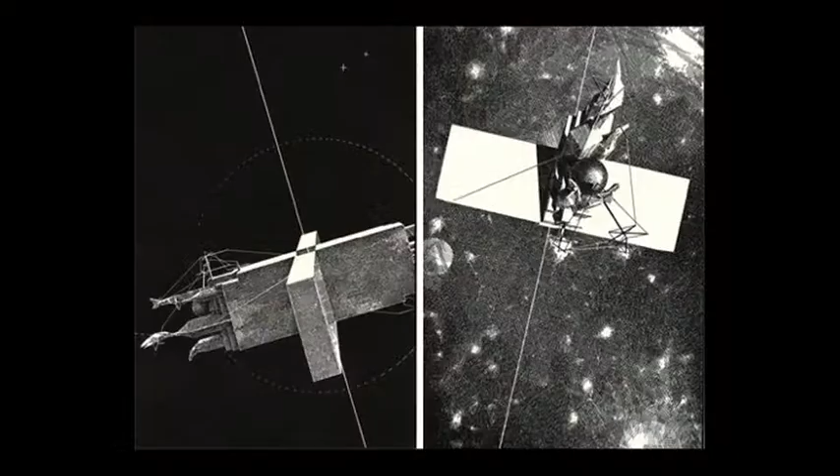Lebbeus worked in ways very mysterious, kind of, he had collaborators, but he led the charge. And I asked him to do a pamphlet architecture in 1980, and he made up this idea of a pamphlet entitled Einstein's Tomb.

From his words, "The tomb is a vessel journeying outward on a beam of light, following an immense and subtle arc through the stars. For eons it will inhabit the dominions of space, until in a distant time it must return to the world of its beginning. Thus a cycle, the epicycle of space and time, will close."

We know Einstein's not buried in that tomb, so I imagined that that tomb was launched on October 30th by the 1,000-mile-long storm Sandy, and now Lebbeus himself travels on his own beam of light invention. And a little bit more on Lebbeus.

By the way, you can access his websites. Many of the things that he said are still quite accessible. There's a lot of information still. And there's one section called By Way of Resistance.

Lebbeus says, "It seems to me if architects really want to resist, then neither the idea nor the rhetoric of resistance has a place in it. Rather, they must create an independent idea of both architecture and the world. One looks for principles, but we are better off if we control them, not the other way around. Principles can become the tyrants foreclosing on our ability to learn. When they do, they too must be resisted."

So these are a few of his, right off of his website. Resist whatever seems inevitable.

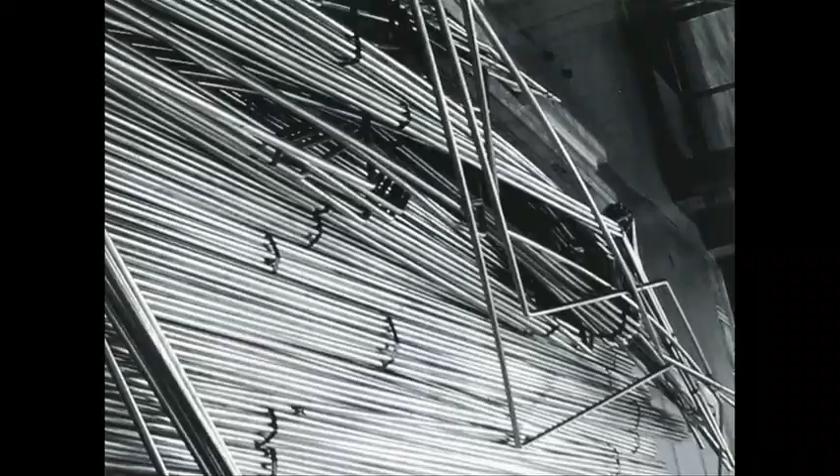Resist people who seem invincible. Resist any idea that contains the word algorithm. Resist the impulse to draw blob shapes. Resist the desire to travel to Paris in the spring. Resist the desire to move to Los Angeles anytime.

Resist the idea that architecture is a building. Resist the idea that architecture can save the world. Resist the hope that you'll get that big job. Resist getting jobs.

Resist taking the path of least resistance. Resist the temptation to talk fast.

Resist anyone who asks you to design only the visible part. And by the way, that's really happening a lot lately, so I'm going to read that one twice. Resist anyone who asks you to design only the visible part. Resist the idea that you need a client to make architecture.

So in the spirit of Lebbeus, this talk then goes back to when I didn't have any clients, and Mark kind of referred to that. And I just made these projects up.

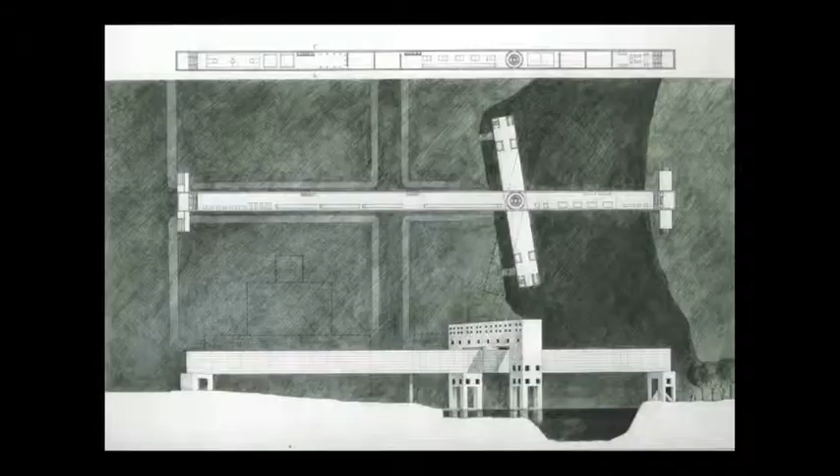I invented a client. This was a gymnasium in the South Bronx, not far from here, a bridge out of the destitution of the South Bronx. This is 1977, and I drew this in Prentis Hall on my brother's drawing board. He was doing a Master's of Fine Arts. The form of the building is a series of bridges over bridges.

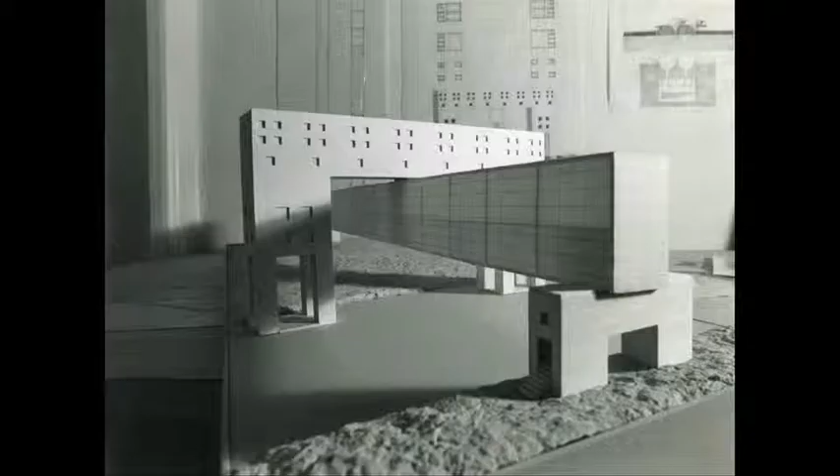Small entrance bridges at each end of the main span served a view down the axis of Brook Avenue. We're not really far from that site. The bridge is in water rather than over water and acts as a structural pivot from which the turnbridge portion of the main span rotates, so ships can go through the channel. You see someone in a rowboat coming down the channel.

And in the floor plan, we had to invent a new sport called long basketball in order to fit it into that long, skinny plan.

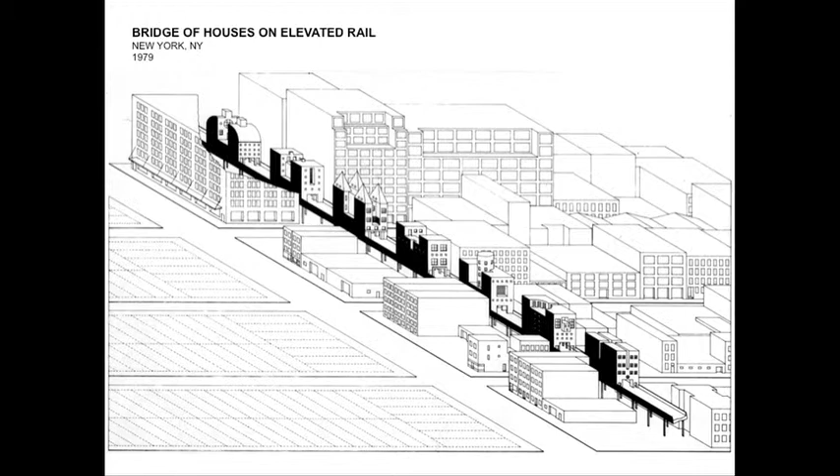Another without-clients project I started in 1979. And I saw myself the last boxcar go over the High Line, and it was a boxcar full of frozen turkeys. I think that was appropriate. And I'm very happy today that I can walk to work.

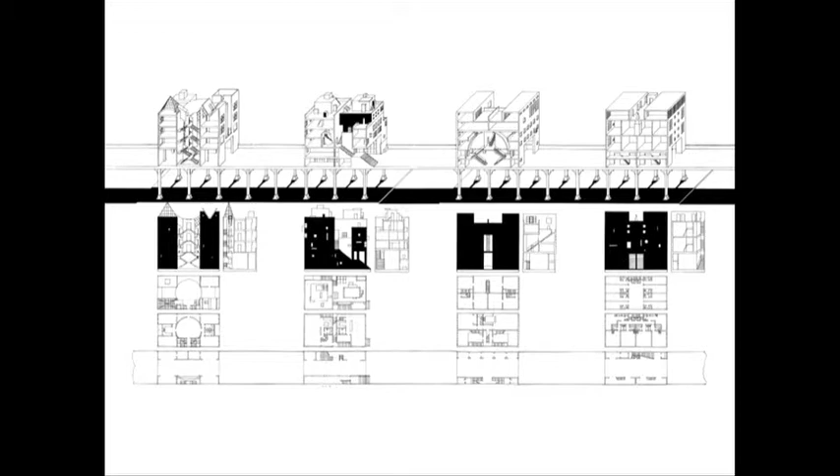This, by the way, was an idea about how many different kinds of people can live in Manhattan. Like you have an SRO hotel, you have luxury condominiums, you have student housing, you have, let's say, 2-bedroom apartments. But right now it's all luxury condominiums, unfortunately. But the public space is there.

And we made several models, many, many models in steel. Another clientless project was the Gedenkbibliothek, a competition in 1988.

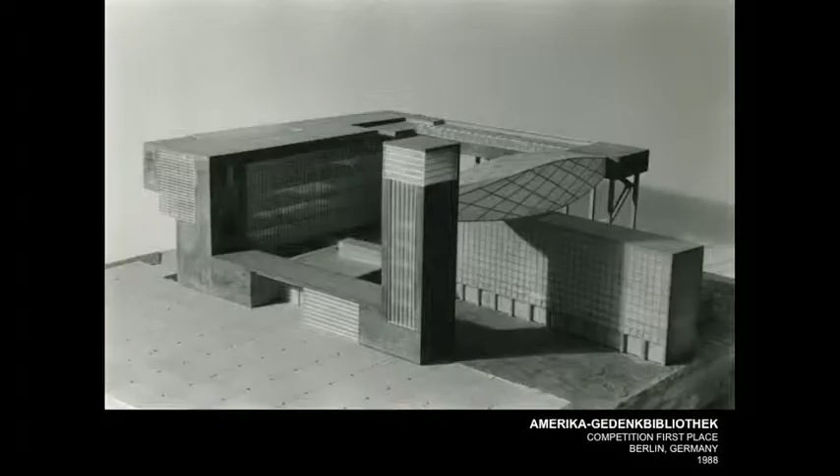The original competition for the Amerika-Gedenkbibliothek, right after the airlift, was for German architects and was paid for by American funds. And this was the reverse. There were 13 architects invited. My project won. It was about a browsing circuit, about the unknown meeting of the user and the book.

The notion of really open stacks. This is one of the first open stacks libraries in Germany, built in 1950. So this extension was really opening the open stacks.

But alas, after the competition was announced, the senator said, 'I will not build this building,' and he ran another round of the competition, and we didn't win that one. And it reminds me that architecture is a kind of war, and what doesn't kill you makes you stronger. You have to just keep going.

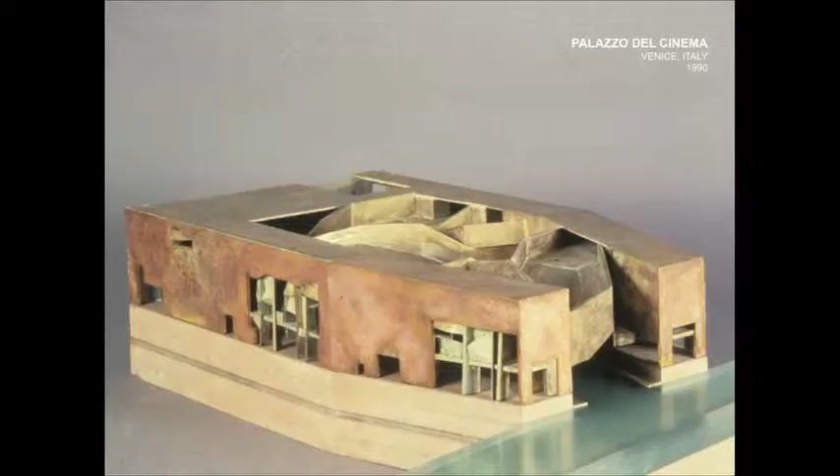This is another clientless project for the Palazzo del Cinema. And by the way, this lecture is called Timelight, so this is really about time. In cinema, you have this ability to take something that lasted 40 years and put it down into 4 minutes. Or you have the ability to take something that lasted 40 seconds and stretch it into an hour. So it's a kind of accordion time.

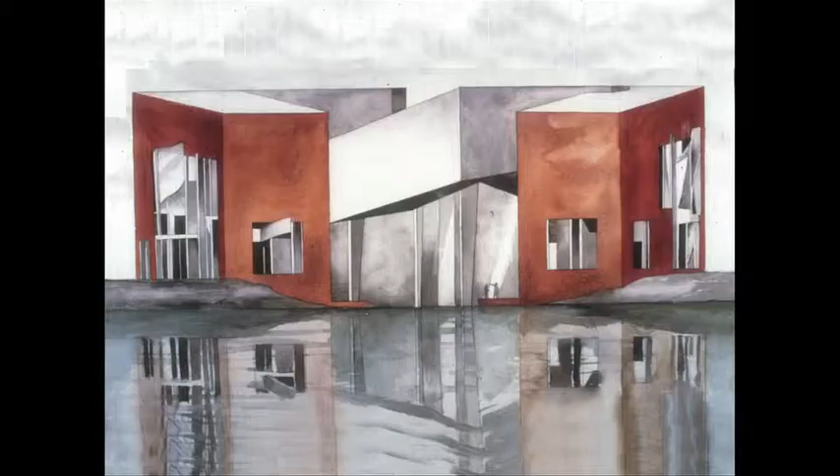By the way, you approach this from Venice via Vaporetto to the lagoon below it. So there's this kind of accordion time, which is cinematic time.

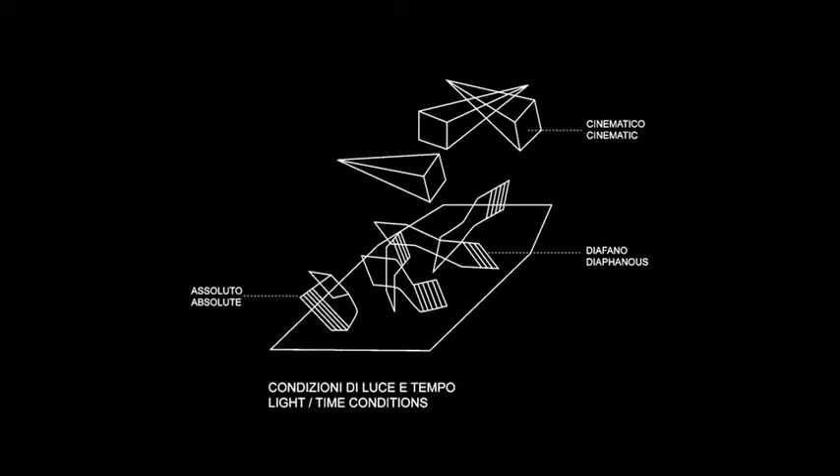The kind of light that drops through into the lagoon is a diaphanous time, and there's a kind of absolute time in a cubic pantheon. And these cinemas interlock, and by the way, all the sightlines work.

We worked on this competition for a year, and I think, in a way, it was a breakthrough project for me. We never expected it to be built, and we didn't expect even the winner to be built, and in fact the winner wasn't built. It was Rafael Moneo, but it was an important project for the ideas of time, the ideas of cinema, and the ideas of architecture, and how cinema is a more powerful media than architecture.

Then recently, last year, we made this book together with Sanford Kwinter about what I called the 7 times of architecture. Afterwards, after the book was published, I realized I made a big mistake, because I had worked on the book for a year saying that there's diurnal time, seasonal time, linear and cyclical time. The Greeks had cyclical time, so they kept perfecting and perfecting, and we're condemned to linear time, which means we have to keep making something new all the time. It's like fashion. That's a kind of trap as well.

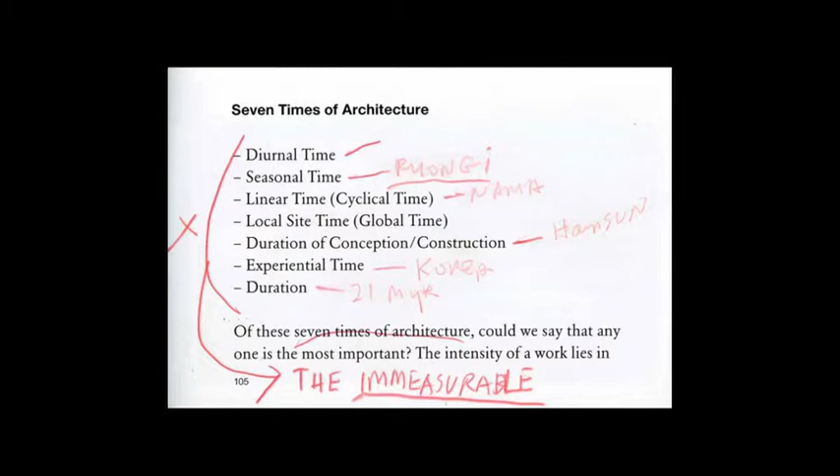Anyway, what I left out was the immeasurable, and I realized that's the most important. I thought about Le Corbusier, what he called ineffable space, or inexpressible space. And Lou Kahn also spoke about the immeasurable quality of architecture. So that book is flawed. If anybody buys it, I will personally inscribe the missing piece in.

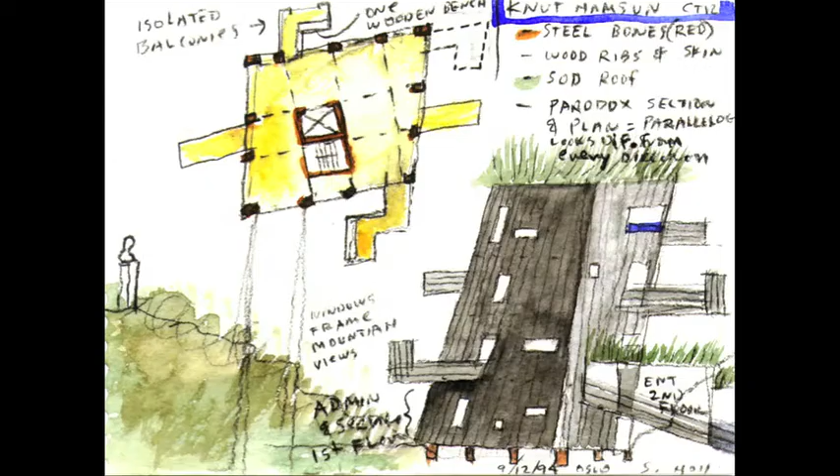This is a project that also is about time and light, above the Arctic Circle. And it's also a project about the struggle of architecture - this took 15 years from the first sketches to the realization. It was for the writer Knut Hamsun, a famous surrealist writer in Norway.

And I see it as a body of invisible forces, inspired by the 1890 novel Hunger. And this is his words.

Despite my alienation from myself at that moment, and even though I was nothing but a battleground for invisible forces, I was aware of every detail of what was going around me. A big brown dog ran across the street towards the trees and the Tivoli. It had a small collar made of Mexican silver. Farther up the street, a window on the first story opened, and a girl with her sleeves rolled up leaned out and began polishing the panes on the outside. Nothing escaped my eyes. I was sharp, and my brain was very much alive. Everything poured in towards me. The women before me had 2 blue feathers in their hats.

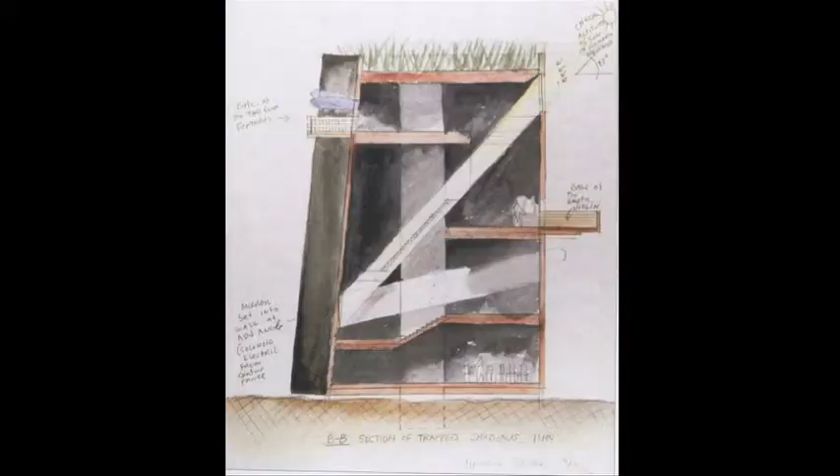I was really excited about the project, but there was enormous resistance. There were some 300 newspaper articles over a period of 3 years, and the resistance came from many different aspects. One of them was about the farm, so we moved the building to another site.

It became kind of the joke of Hamarøy. In the tavern, they built a model and served beer out of the model. And yeah, it went on and on and on.

I thought, okay, this was a school teacher sending her students out to draw vernacular buildings in the landscape, and they all came back with the new Hamsun Center because it was in the newspapers, and that was in their minds. They couldn't see the landscape. The media is so powerful today, it's just going to blind you.

But someone came from Narvik and said, this building must be built. It's important for Norwegian culture, et cetera. And he says, I'm going to the parliament. And he went to the parliament, and he got the thing funded. Suddenly they said, we have to have this ready for the 150th anniversary of Knut Hamsun, which was only 14 months away. So they worked night and day in 3 8-hour shifts continuously for 14 months, and they finished it on the 4th of August, 2009.

And it's a great site if you get a chance to go there. But it's also a building that really does capture the angle of the sun and how it changes in time. The windows are not aligned to the floors, so the floors slip and slide up through the building, intersecting the windows in strange places, and you get a real kind of amazing condition of light and time changing.

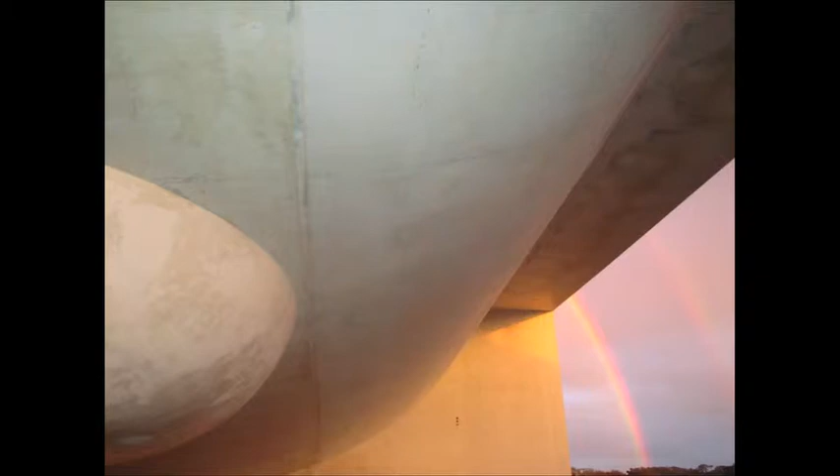And then under the sea, there's nothing on the curved surface. It's just one big curve without a single light fixture or any imperfections, thanks to Hervé Descottes and a great team of people that worked on the project. So you really feel that sense of the sea in this white concrete, and it's a great place to experience the sunset.

This is the only surfing city in Europe, Biarritz. So that's a longer story, I won't tell it now.

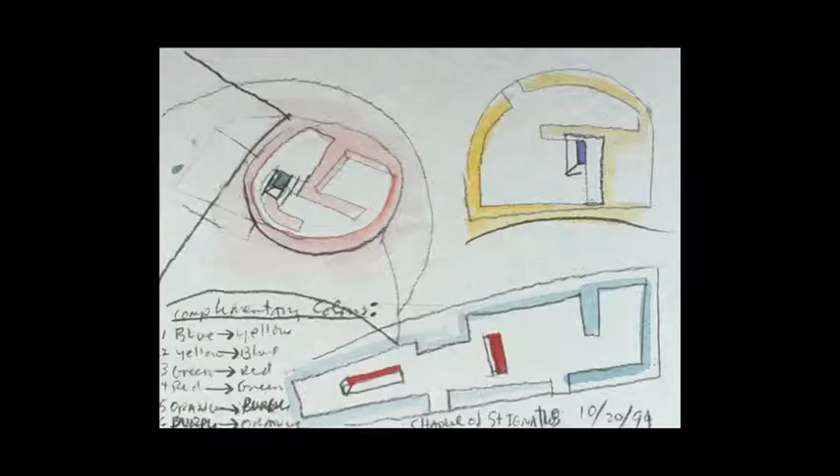The exercise is a kind of complement. There's a speaker and then there's a receiver. So we had the idea of complementary colors. So wherever there's a yellow field, there's a blue lens. Wherever there's a green field, there's a red lens. And so everything is in complementary colors, like the spiritual exercises of the Jesuits.

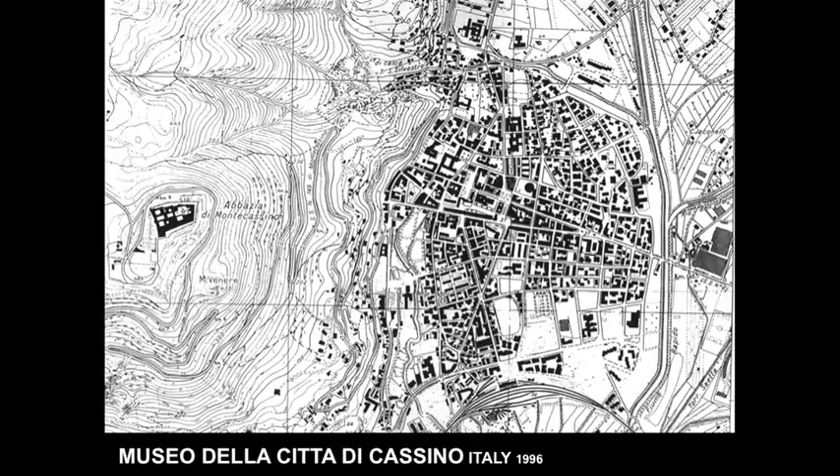And this project is really without a client. This is a totally hopeful, wish-we-could-do-it project that we did south of Rome in a town called Cassino. A monastery was bombed by the Allies in 1944, and it was going to be the museum of the city of Cassino. And they had no program, so we had to write the program.

And I decided the building should be about light, as if it was a score, like a dance score, like a Laban notation. And it would take me an hour to present this building. But Jeff Kipnis said it was one of my most important projects. And this is a long time ago.

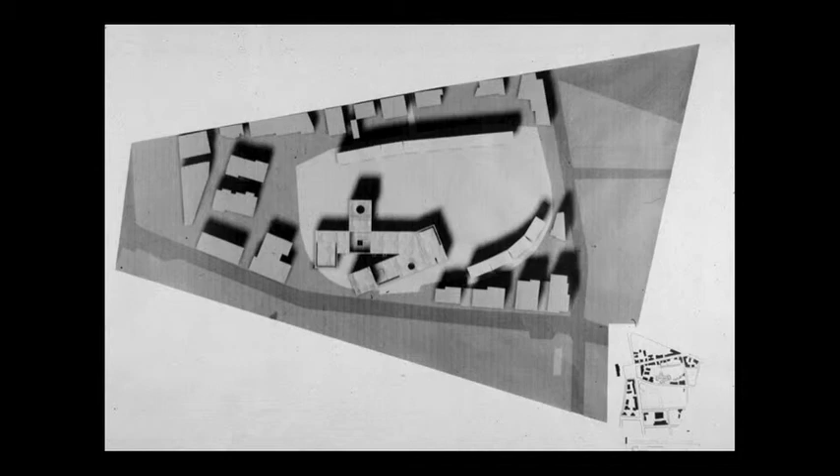This is 1996, I think. And it forms a public space.

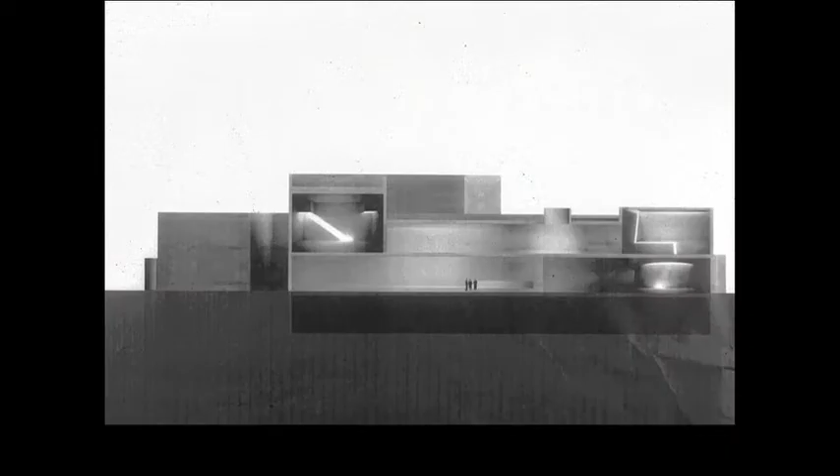And then the way we discovered how the light would come in - these are kind of crude sections, but we built models of every piece. So each condition of light was studied in model form, and all these kind of strange occurrences have to do with the angle of the sun.

And you can't model this in a computer because light falls off the surface of something by the square of the distance from the source. So there's no ray tracing program that can do this. You have to build models to check this light and to see these phenomena, and also to check them at the time of the day and how the sun moves.

But there are a series of simple spaces with some amazing conditions, and we thought they could close this off and darken it if they needed to. But each room then just had this condition of how the light could change it - just one slice of light.

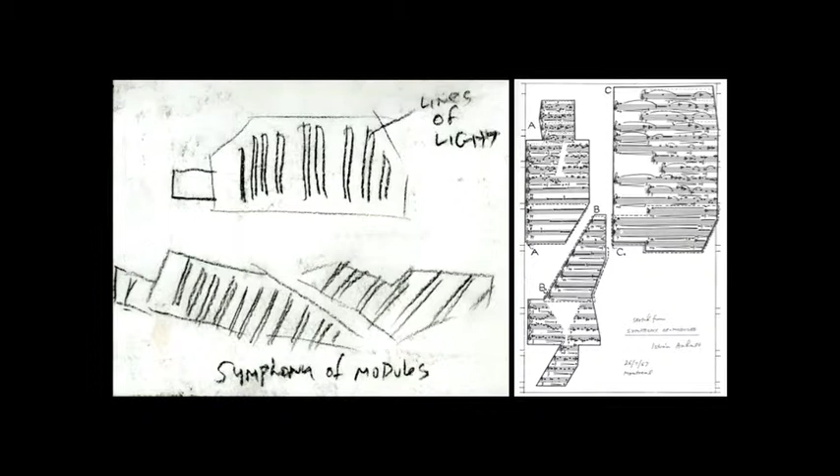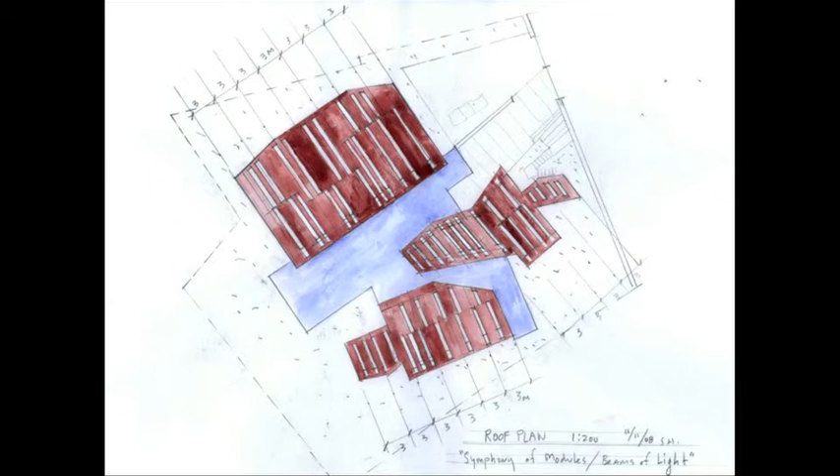And then we realized last year a building which is about music and time and light. This is a building that you can see on a couple of videos, built around the analogy of Symphony of Modules, a piece of music written in 1967 by a Hungarian composer, István Anhalt, and never played. It was never played, and it had too many people in the orchestra - it was too complicated to play. It became our analog for the light coming into the frames of the building in 3 parts.

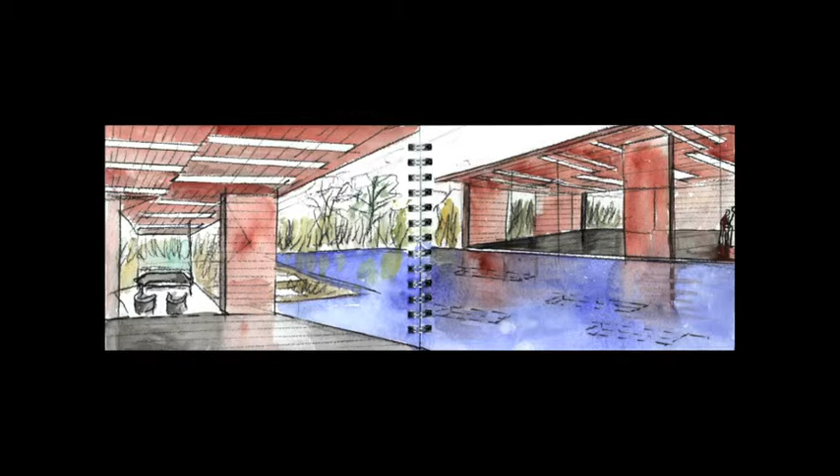It's a gallery and house, so there's a 10,000 square foot combination, mostly gallery, and there's a sheet of water that unites everything, and the 3 pavilions push up. So one's an entrance pavilion, one is the main house, and one is a guest house, but the gallery connects everything below.

I think we did 30 schemes for this project. And once we had the concept of the Symphony of Modules, it came together in a week.

It was a great client. They really appreciated architecture, and they kept giving us presents for doing our work. They gave us a plaque, and every time I came over, they were giving us another present. They did everything we wanted.

I wanted to do this in copper, but stained in a special way to turn this leathery red. I couldn't get it done in Korea, so I said it has to be done in Kansas City. That's the only way we can get the color.

And they did it. So the whole facade system was built by Zahner Metals in Kansas City and shipped to Korea. So everything isn't made in Asia. Some things are made in America and go back to Asia.

And the building is really an experiential thing. Here you are, you've just come into the entrance, and you come up into the entrance pavilion, and you think you're inside, but you realize you're really looking at the outside. Not really, because this is the inside of another outside. So you're inside looking at it outside, but that outside is really the inside of another outside. So the condition begins to be more like music.

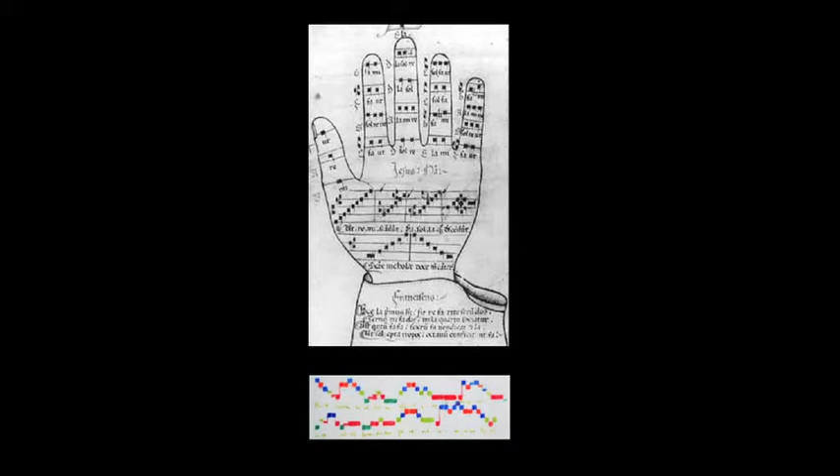I wanted to connect to music with this because I think music is a kind of healing. In fact, in the New York Times just three days ago, there was a whole article about how music has a healing capacity. So these people are cancer victims, and so I connected to neumes, which is the Gregorian chant notation before the 5-line staff. I took the colors and tried to insert them.

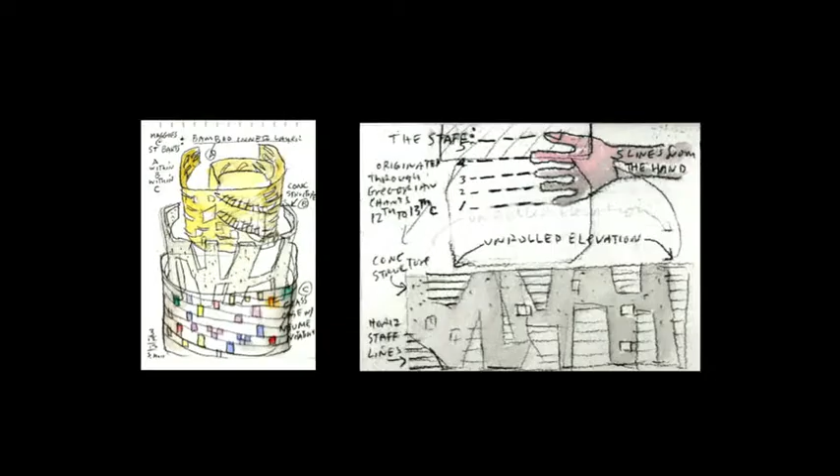And the building really is a thing within a thing within a thing. There's a bamboo kind of interior, there's a concrete structural frame, and that's all wrapped in an Okalux skin that has these neumes floating in it. Then you can see the kind of condition of the staff lines.

It's a very modest building in a way, but I think it's going to be a powerful one because of the details. The details, we have developed something new, absolutely new.

Okalux is a kind of like polar bear hair. It's hollow, and the glass is very thick. And you can insert, in between the outer membranes, a sheet of color. But that color dissolves like a Mark Rothko painting. So that's a new material that we're developing with Okalux for this project.

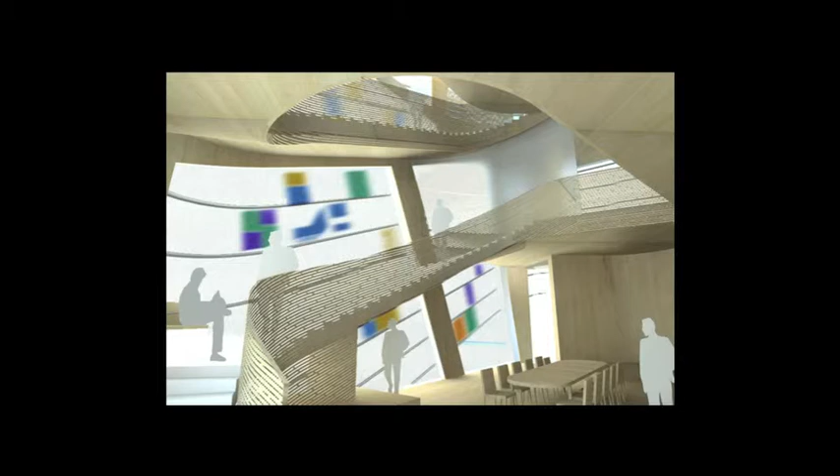And that's just in the works now, so that should be coming up soon.

Now, I was going to do the whole lecture just on this building, but I didn't have time, and I'm kind of glad I didn't because I realized there's just too much material. We were asked to do this building and have a design ready for October homecoming. Mark, do you remember that? Come on, it was like August, and they wanted a design to show everybody on October homecoming. That was scary.

So I immediately tried to have an idea. Well, the first designs actually, well, first of all—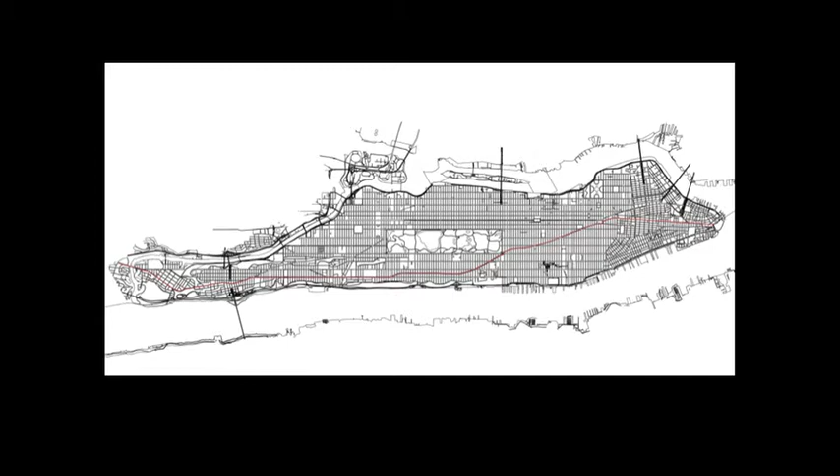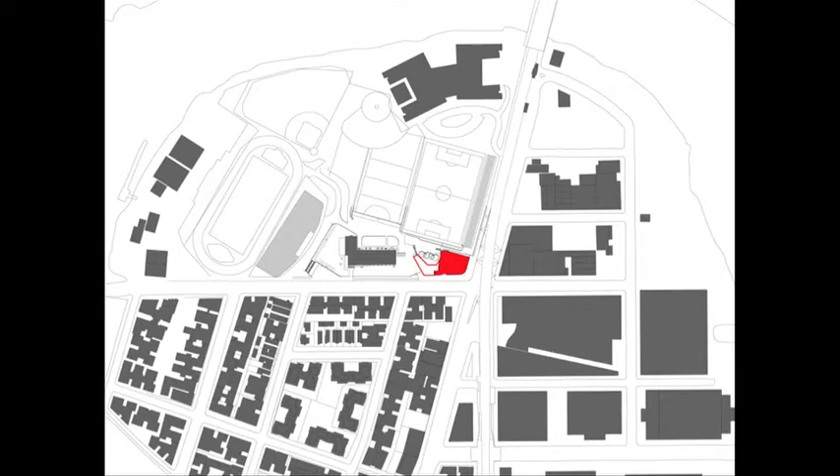It's like Mark said, it's a very important site. Broadway is the first street in all of Manhattan. This was an Indian trail, and here we are. This is the most important street in Manhattan, the oldest street that connects all of Manhattan. And when it crosses, that's the first bridge into Manhattan. That was King's Bridge, built in 1693, the first bridge into Manhattan. So the site, there's Broadway Bridge, that's the site of the first bridge into Manhattan.

Now it's Broadway Bridge, so the site is very charged. One of the first things, I kept looking at the Broadway Bridge. This is a lift bridge, I think, of unprecedented strength because it has to lift the subway trains and the automobile lanes. So it's an enormous power to lift all these things up so a boat can go through there. But then you get this whole structure, this strange gray structure.

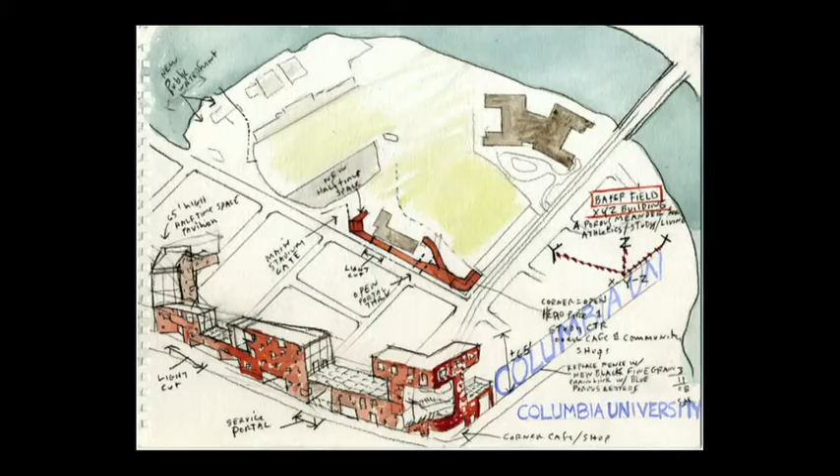When an architect gets a commission and they say, well, let's just do whatever, immediately I want to redesign the whole area—everything, engulf the building next door, go up the street and change this. That ended pretty fast.

They said there was a budget, which was very low. And thanks to Olaf and Chris McVoy, my partner, they somehow made the budget work.

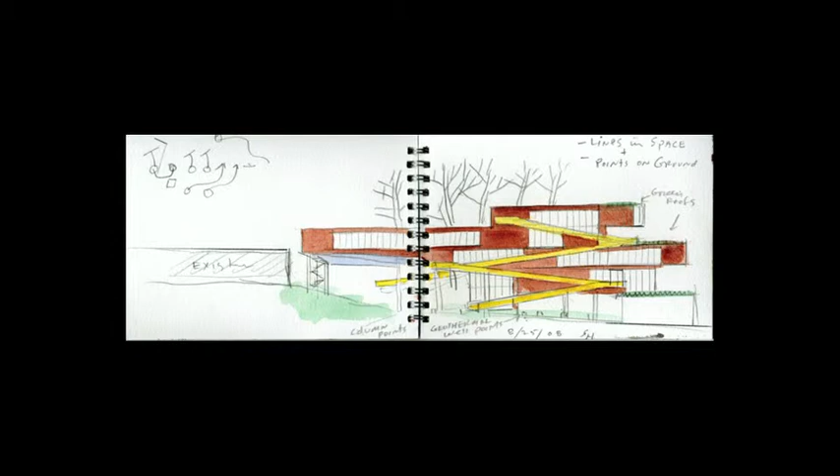So now you see, this is what we showed in October. We said it's like a football play, points on the ground and lines in space. By the way, I played pulling guard on the West High Wildcats in my high school, and I was calling defensive signals and playing offense. I was one of the only players that played both offense and defense. Those stories helped me get through the first part of the commission because I could talk to the football people, football language. And I think we showed them some of these drawings.

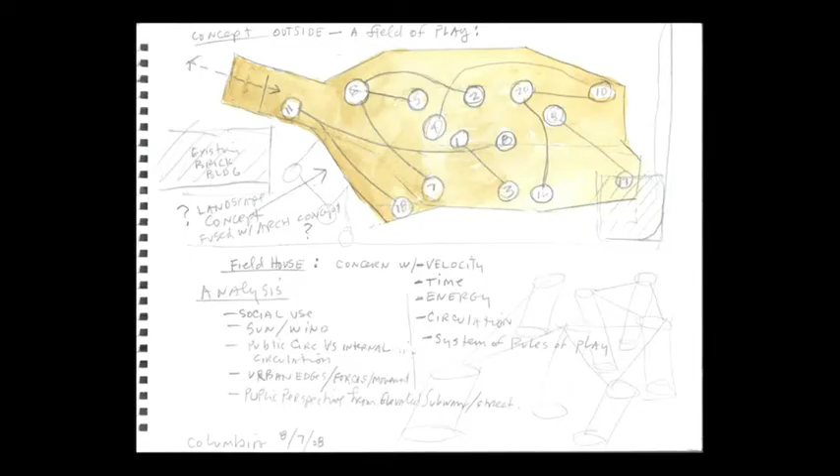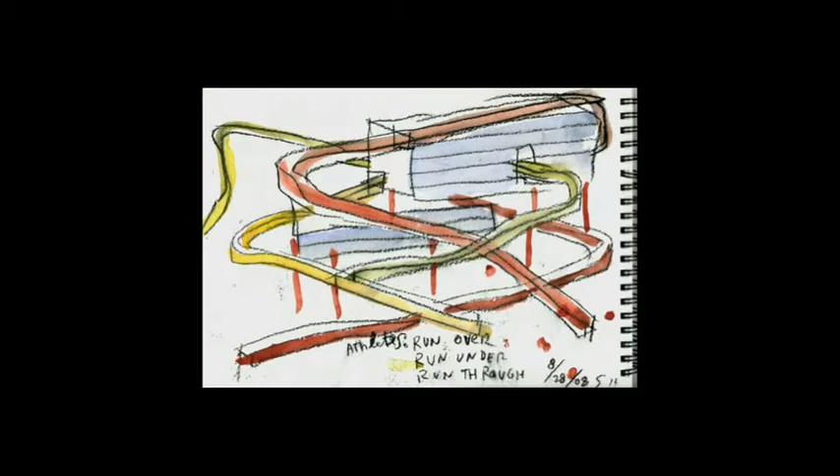Field house, velocity, time, energy, circulation. And then we have to try to translate this concept into the form of a building. So I'm making sort of points on the lines in space, points on the ground. And then I had the idea that athletes run over, they run under, and they run through.

And then we made a series of models because we said that the running under is very important. So what it looks like from below might be more important than what it looks like from above. And then we started just looking underneath the building.

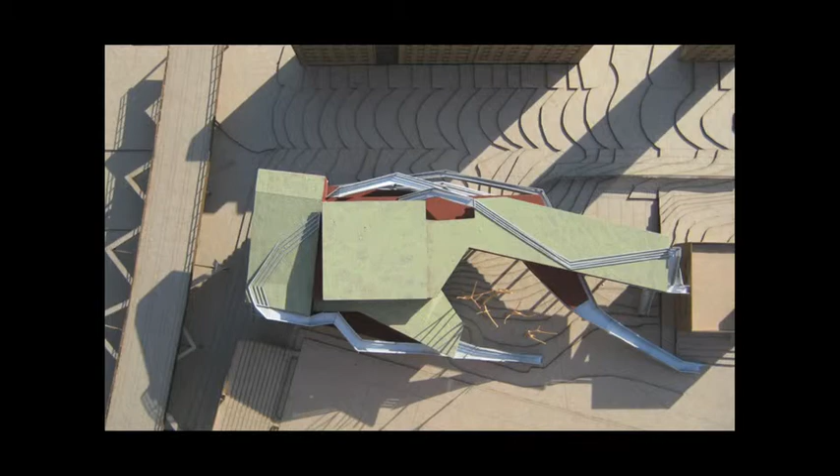And then we started to connect it to the other field house. That didn't work—it's too big, too, by the way. Here it's over budget, totally over budget. And then it was brown, it was Corten steel. And Michael Bell came up and said, 'ugh, it's so heavy, can't you make it something lighter color?' And I immediately made it into aluminum.

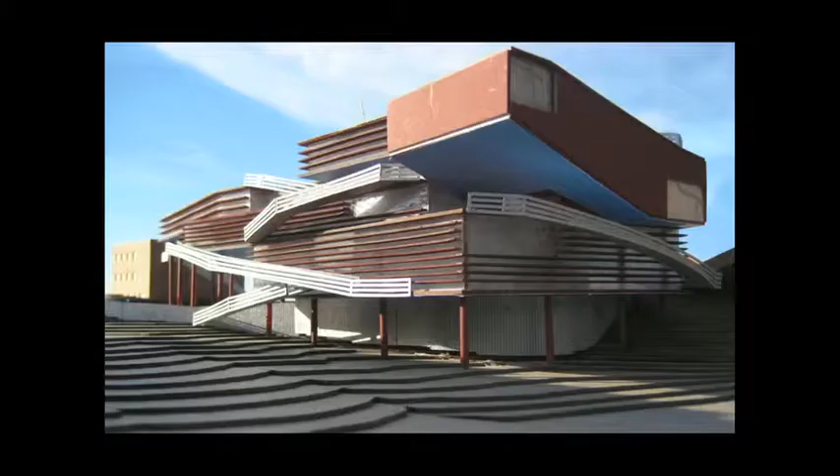Then there was a moment where I said, it's got to be linear, points on the ground and lines in space. And then it got really ugly for a couple of weeks—enormously ugly. But I was just saying, let's stick with it, maybe we're going to get something new out of this. Thank God we realized to lay off.

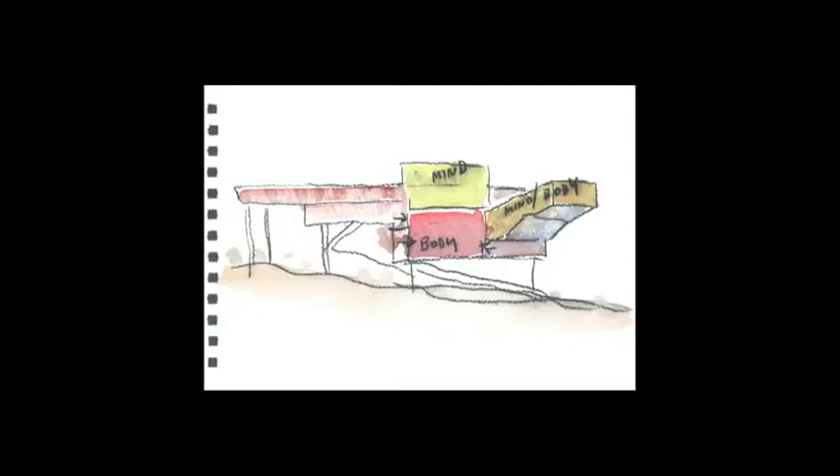And then there was a meeting with Mark, and we started to talk about what's inside this building. We said there's three main parts: there's the body, that's the big gymnasium; there's the mind-body, that's this room where, by the way, the seats you're sitting in are very wide because you're supposed to be sitting with football gear on—hip pads, shoulder pads, that's why those seats are so wide. And by the way, we didn't design them because there's no budget for us to design those seats. So, I mean, you don't want to argue with a bunch of football players either. But it is the mind—this athlete scholar—the body, and the mind-body.

So that became more the diagram without points and lines and the blah, blah, blah. That became the diagram that we could communicate with the client and everybody around, except my other idea was still hovering under there. So it's an interesting problem because I always say that you need to have a concept that drives the design, but in this case, so many other factors are working on it that it starts to become something, a third thing.

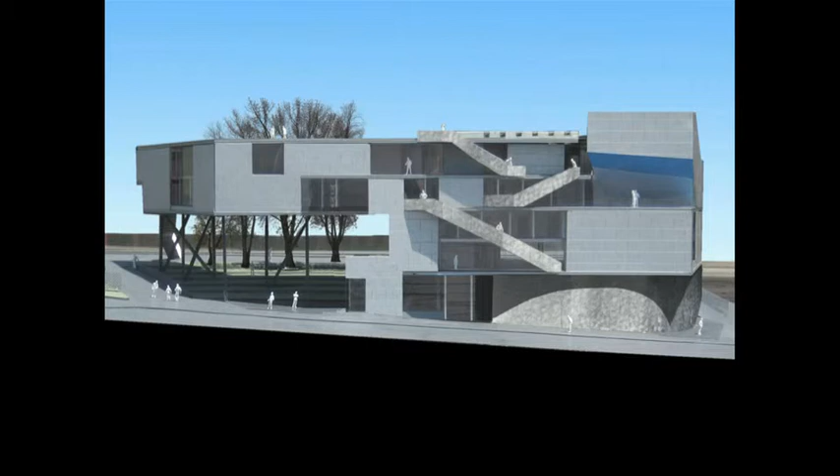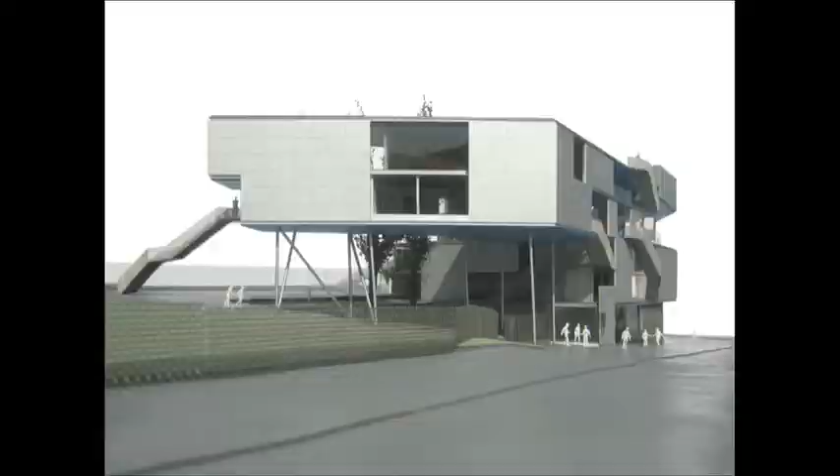And so as it progressed, many forces were involved, and it's an enormously difficult client—I hope they're not in the room. They leave this to us, but we got through it. Lee Bollinger was nowhere to be found. Wonderful man, invites you to do something, says would you be willing to, but then you never see him again. Only at the opening: oh, great job, Steven. Yeah, but what about all that hell we went through for 4 years?

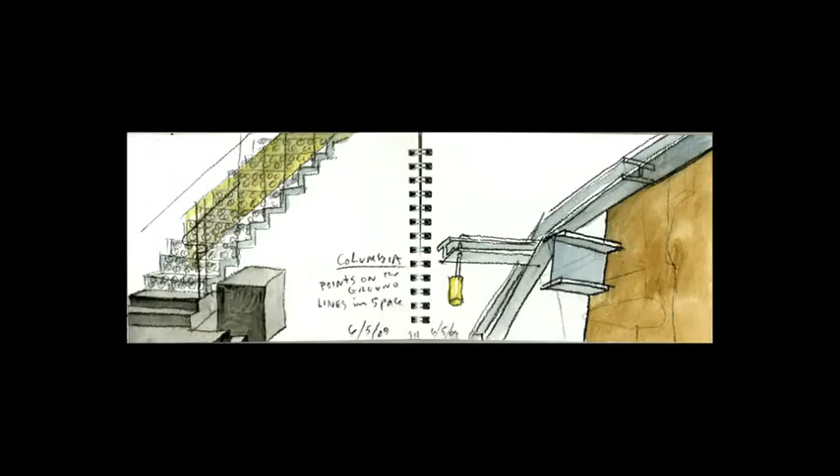And there were models of the inside, models of the outside, models of the details, and details that had to be in the steel drawings. You go outside, I think you can see this light—that had to come in the structural drawings because I wanted this piece to come into the light to hang out there.

And then we had the groundbreaking. We weren't finished with the drawings, but we had the groundbreaking. And there's Lee, he shows up. Oh, nice, good idea—I'm nervous as hell. I have the tie on, I'm the only guy with the tie on because I'm nervous. It's over budget, they don't have the money yet, but we're breaking ground anyway.

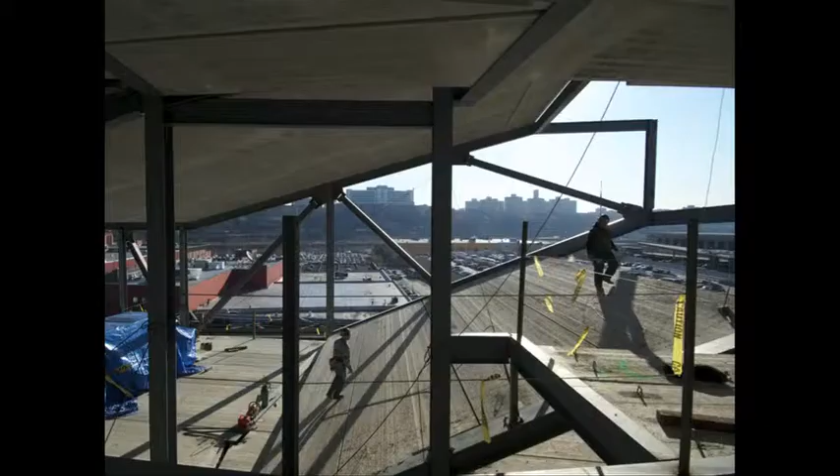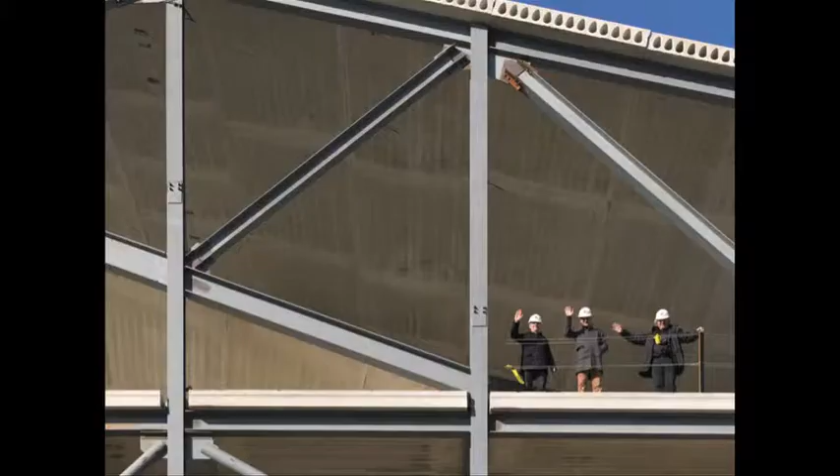And it has to be open in September, and I don't see how they're going to ever get it ready. But because it was all prefabricated, and Olaf was a genius, the steel pieces were already in production when we were breaking ground, right Olaf? And the planks were in production. So it was like an erector set because the foundation was already in. By the way, we broke ground and the foundation was in already, so it went together very fast. I went to China and came back and they said let's go up to the site, and I said what? Where did all that come from so fast? It was all there. And then they topped it out very quickly, by the way.

Amazing—build everything out of precast things, in Manhattan especially, because it's built in New Jersey, it's much cheaper. All these steel beams were built in New Jersey. There's a steel beam in the gymnasium that weighs 38 tons. Is that right?

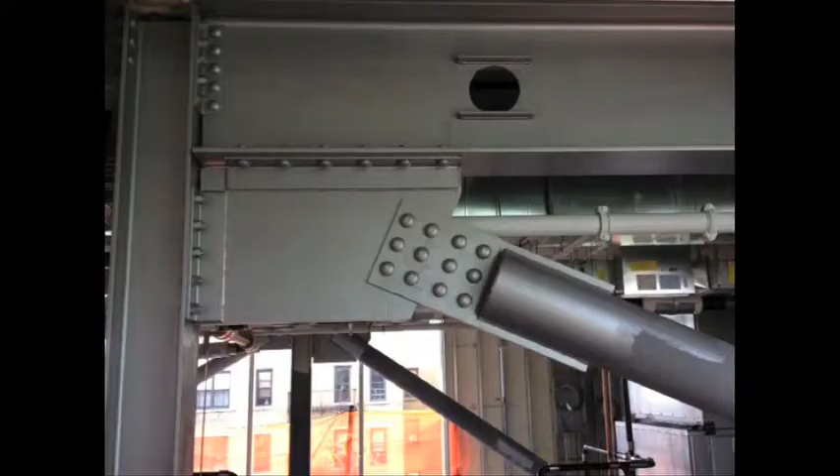It's so heavy they had to have 2 cranes to put it in place. That's because I didn't want any columns in the gymnasium. And then we wanted to expose all these, because these are beautiful—these are all structural joints. And these are bolts, but they look like rivets, so they had that feeling of the Broadway Bridge back in the days of riveting construction. And so we cut holes in certain walls to let us see those joints.

And then the underside is really important, so you have to see it in the sunlight, in the reflection. And that, by the way, is New England ceiling blue. If you know anything about New England houses, all the porches have that baby blue, sky blue paint. It's not Columbia University blue, it's New England—don't tell anybody, they think it's Columbia blue. It can be whatever you want—it can be Columbia blue, or I want it New England blue, it's like whatever you want it to mean.

And then the stairs have another linear pattern, which we developed to catch the light in a special way, and that's why you have to come up here in the sunshine. Oh, and then the rail, the train goes by, so when you're in the gym it practically feels like it's going to come into the gym with you, and that's a pretty interesting experience. But this detail, it's all digitally cut and was hand-drawn first, and the idea really works wonderfully—it picks up the sun because the sun hits the thickness of these lines in different ways depending on which angle the sun is going, and then it throws very interesting shadows. I don't have a good slide of that phenomena, but it's really a wonderful phenomena of lines of light.

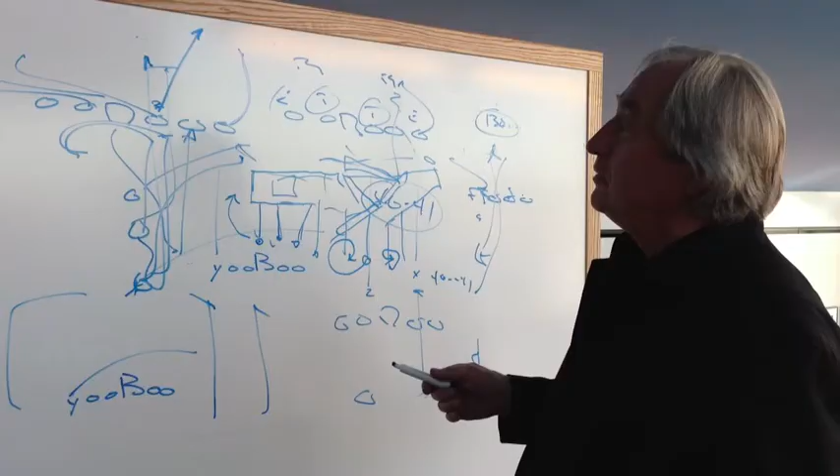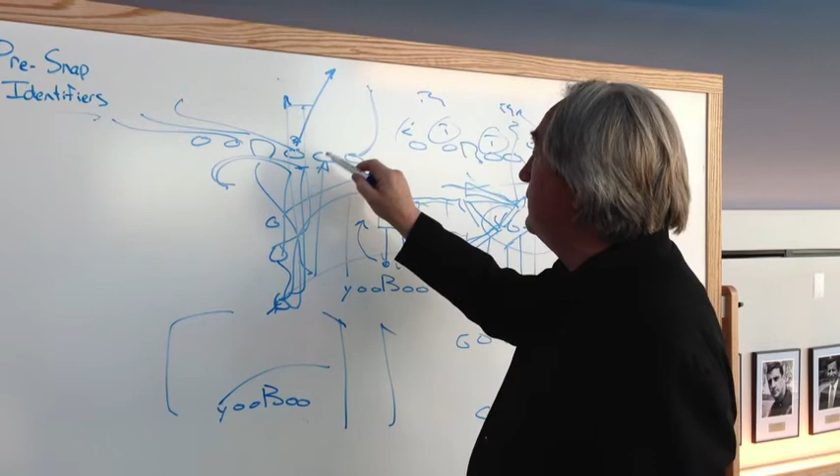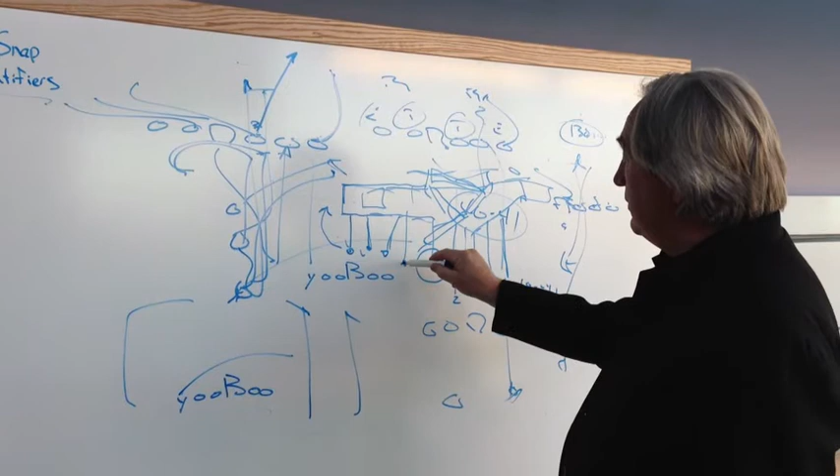So this is a football diagram called pre-snap identifiers. You can see the yooBoo, and you see the points on the ground and the lines in space. That's the pulling guard—I used to play pulling guard. And here's the building, it just fits right in there. There's the auditorium, and these are the points on the ground. And then the legs could move, maybe—people go up and down, onto the roof, then down the stairs, and onto the field.

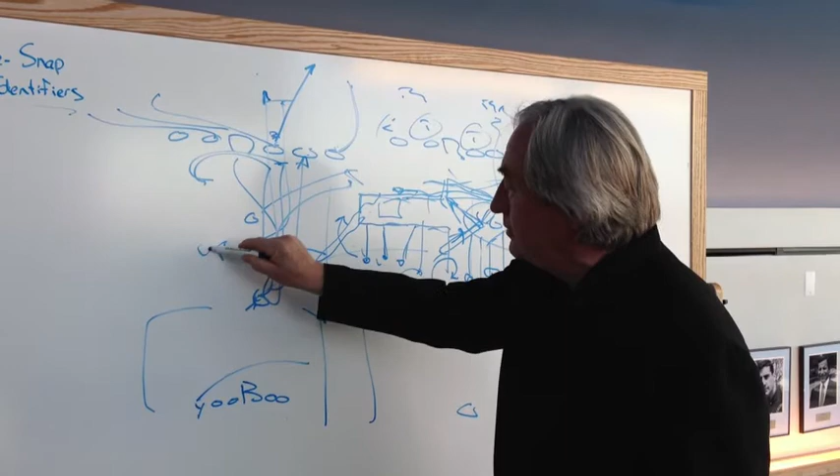You gotta sign it. That drawing, that original drawing is in the room next to you if you want to.

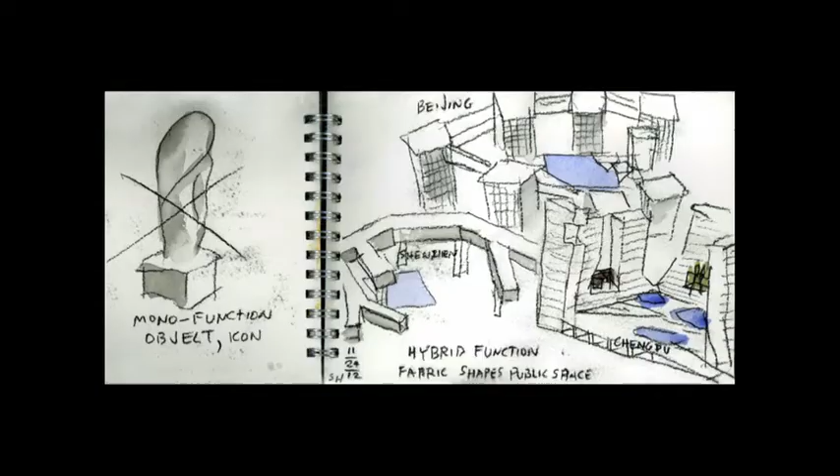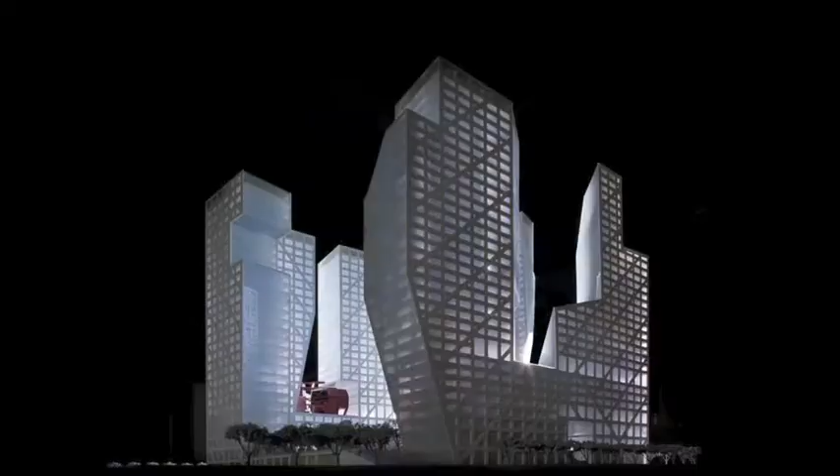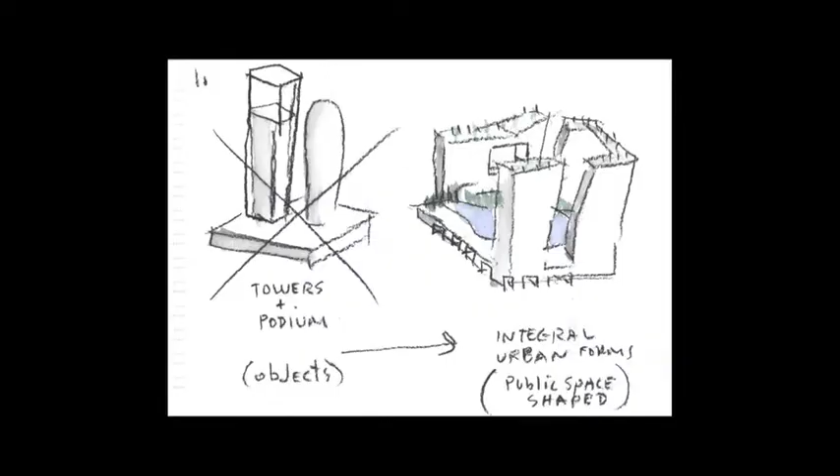The building is an exoskeletal concrete frame sliced by the sun. The idea of an integral urban form, making this urban space, making a public space with the building, the notion of micro-urbanism, the shops in the shopping center below that also open out onto the street and give life to it, and then these micro-urbanistic buildings within buildings.

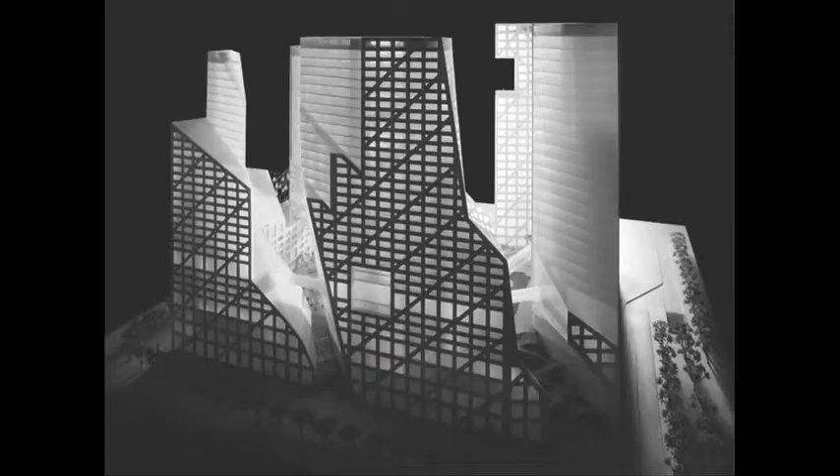That was the first sketch of building within building with three. I wanted three. So then we said, what will they be? That's the sunlight slicing. This is the 2 hours of required sunlight in China, slicing, and that gives us the 2 hours we need here. That gives the building its form. These are the actual diagrams of the required sunlight, so we just followed it.

We just said, okay, the structural concrete frame, that's the load-bearing frame. These are earthquake forces, and then where it's sliced, we turn it into glass.

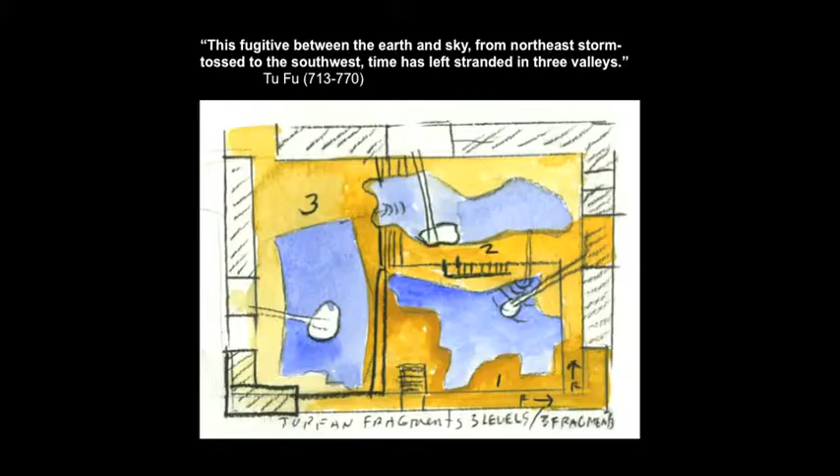And then there was the idea for the main garden, comes from a poet who lived there in the year 713: this fugitive between the earth and the sky, from the northeast storm-tossed to the southwest, time has left stranded in 3 valleys. So that gave us 3 valleys, and each one has a different idea of time.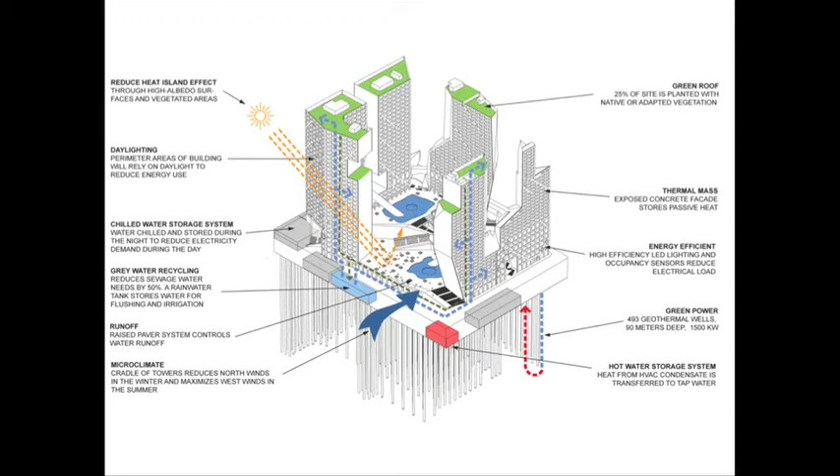I won't talk about this, but it's very important - another professor should give you a class on energy. I think today it's more important than many other things we do as architects. On every project we made in China it's almost like LEED platinum. This is all geothermally heated and cooled, with every possible system, which would take another hour to speak about.

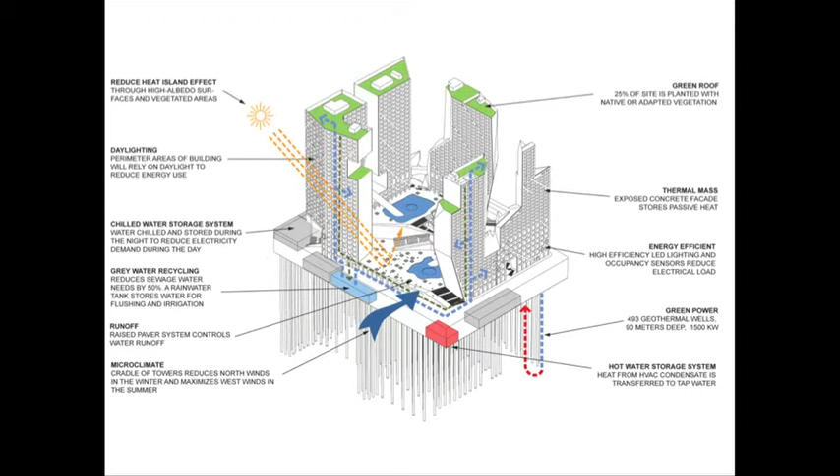So when you see the building on the horizon in the city, you see that it's a space and not an object, because it's forming this public space. This is a piece of a much longer film by Spirit of Space.

That's all structural concrete, very thick, with a penetrating white stain. There were 150,000 people who came to the opening of the project in November.

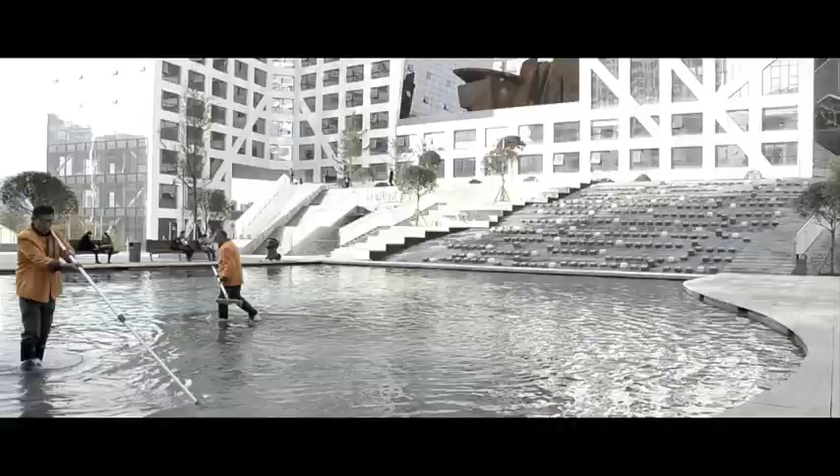Fountain of 365 days. Each one of the fountains has to do with time. This is the Du Fu quote in cast iron.

History Pavilion. The provincial history of Chengdu is projected on the bamboo walls. And there you can see the Light Pavilion.

So this project for Lebbeus was really important - it ends up being the last building that he built. There's a wonderful book by Christoph Kumpusch, The Light Pavilion, just published by Lars Müller, that goes into more detail. But you can see right from the first sketches this notion of vectors, the notion of forces, and the notion of, let's say, occupying this carved out space.

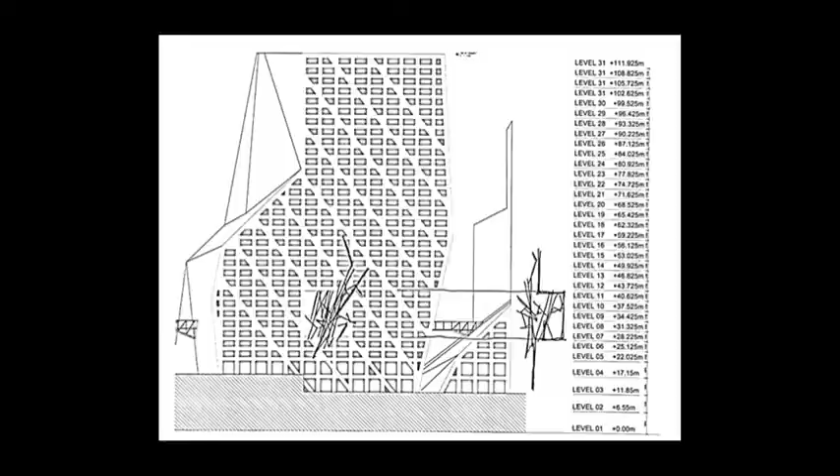It's about 4 stories tall, engulfing several levels and connecting with different levels of the building. Over a period of about 2 years, Lebbeus and Christoph worked on the development - how the walkways would work, exactly how to occupy and be suspended inside.

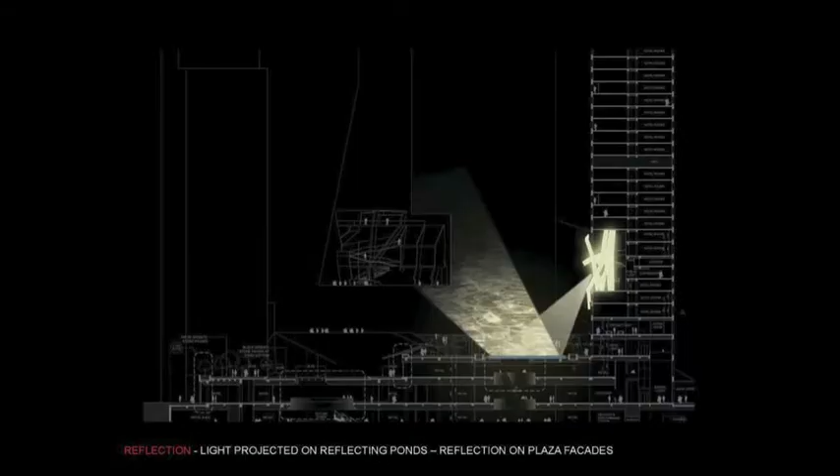And then the client tried to push it out of the project because of the budget. So we had a genius moment where I said, wait a minute, that's the light fixture that lights the whole public space, you can't push that out of the project. And that somehow saved that part.

And Ai Weiwei, we couldn't argue Ai Weiwei, so they didn't build Ai Weiwei's, but there's just a big hole there where Ai Weiwei's is supposed to be. So then this became sort of more instrumental, as it's going to give light to the space, and it really does light the whole space.

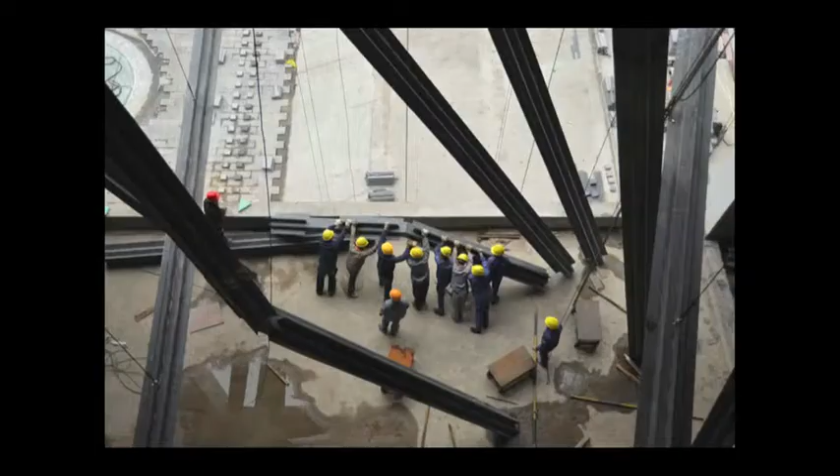It's amazing. And then more models were built, and then the construction, enormous pieces of steel occupying the inside of the lenses. And I went to Chengdu to be sure everything was going correct.

So inside of those wonderful, delicate lines of Lebbeus Woods is this enormous steel section carrying the load, because they're going out from the building, cantilevering, and going way out from the facade.

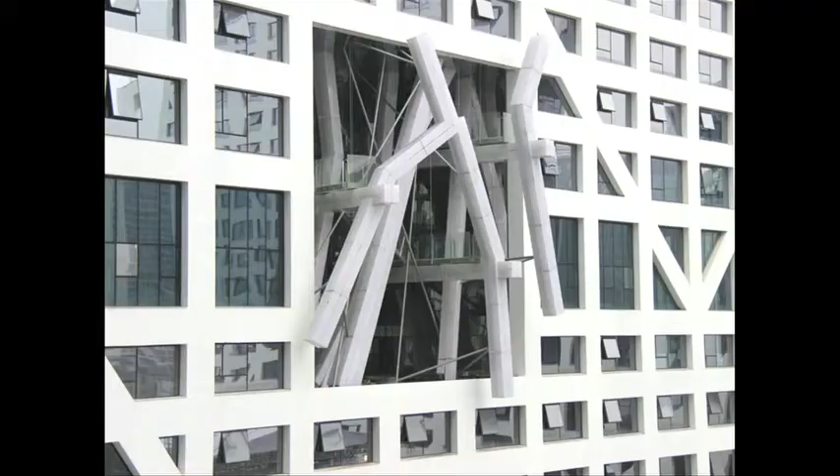You see the walkways there, standing here. You can stand there and walk down those stairs and stand there. And the entire envelope is lined in polished stainless steel. There you can see it's coming out from the facade a couple, 3 meters. And you walk out from the facade, so you really feel you're outside.

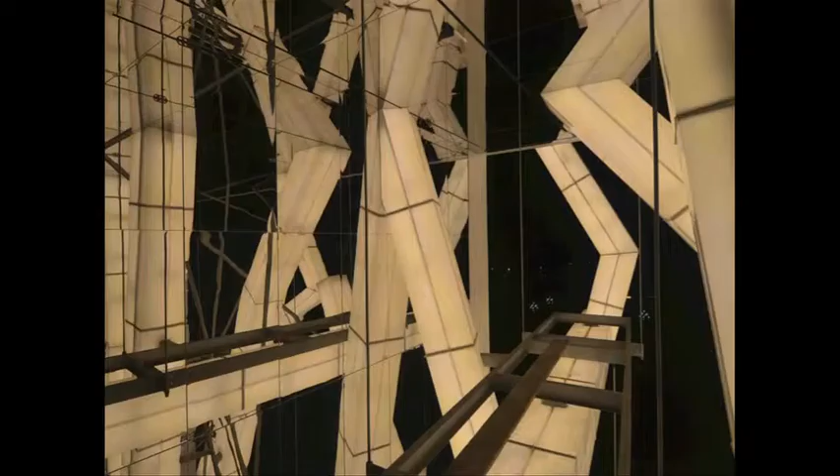That's a construction drawing, because the walkway is not in. Standing here in the light pavilion of Lebbeus Woods in Chengdu, in our sliced porosity block, is an amazing experience. Lebbeus has realized a work that is actually everything he ever drew.

Anti-gravitational. The feeling of up is down, the feeling of down is up. It's an amazing piece cut into the side of this building, which when you occupy it, you really understand the work and the sort of feeling, the vision of Lebbeus's work. And I'm really enormously excited that this piece of architecture got realized.

So when I was there in November, I realized they had named this building Shiguang, which means time light, or in a way, the Chinese people here will know what that means. It means something like time light transcendent. So they gave it their own name. This is what happens in China.

I love it. You see, CCTV is called Dakucha, big pants. I think he's probably angry about that. But for us, time light, Shiguang, that's wonderful. I'm very happy about that.

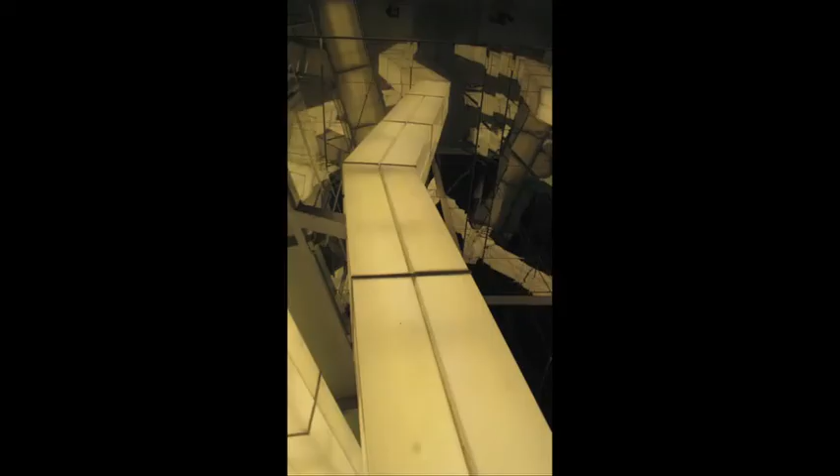So what I think is important about Lebbeus's Pavilion is that it's as if, okay, I know he worked in 4 dimensions, always, X, Y, Z, and time. But because he dissolves the axis vertically and horizontally, it seems to me that there's some kind of 5th dimension to this project. In a way, it begins with the XYZ, and then there's time, but this dissolution of the XYZ because of the way that everything dissolves in all directions.

Yeah, that's something important, and you have to go in it to see it. And it does light the whole space.

And I'll just end with the first quote, but longer. There is no such thing as architecture. What does exist is the spirit of architecture, but it has no presence. What does have presence is a work of architecture. And at best, it must be considered as an offering of architecture itself merely because of the wonder of its beginning. Thank you.